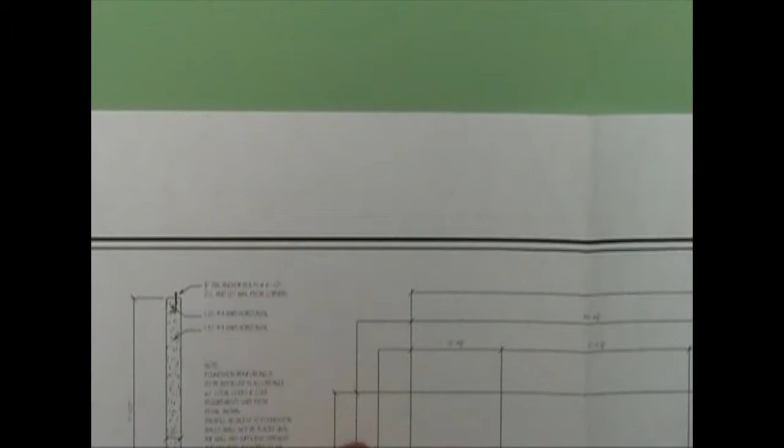Okay, let's look at concrete walls. All right, now for our main, excuse me, the video there. Okay, for the main walls that go around the house, according to this detail, we've got 7 foot 10 inch of wall height. Okay, and that's for the main house, the main wall around the house. So the wall height here, 7 foot 10 inch, and it is an 8 inch thick wall.

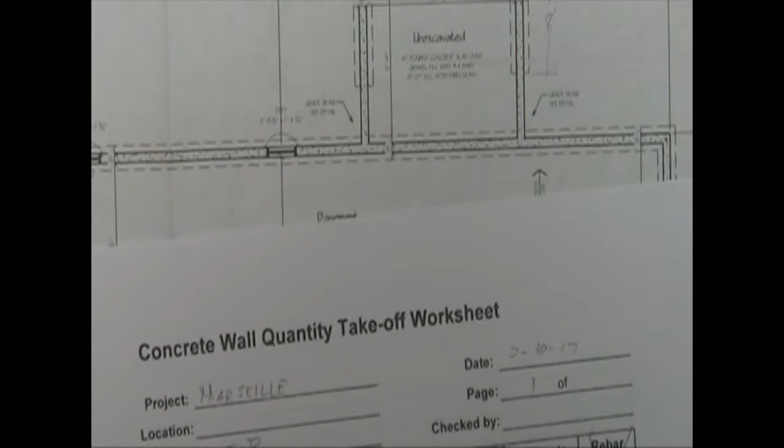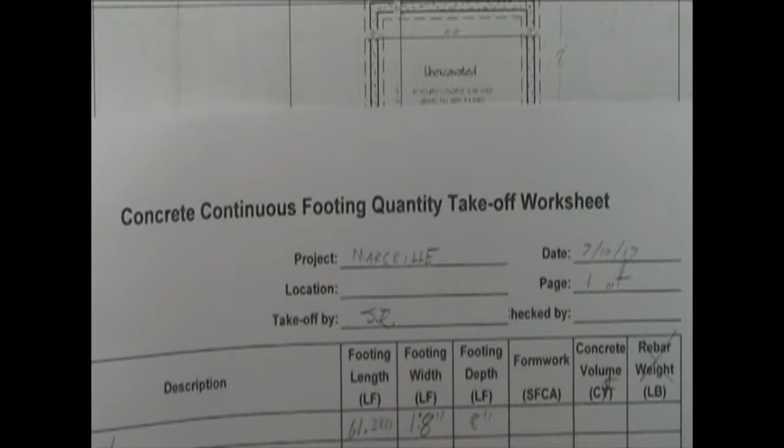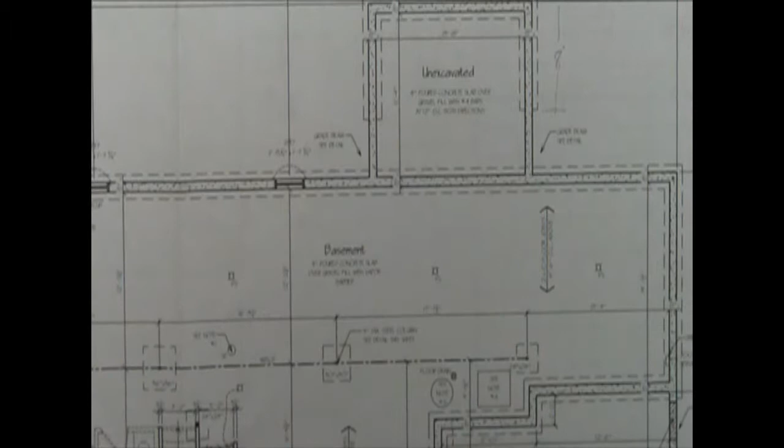Now, for length, you can do the takeoff all over again, going center of wall to center of intersection. However, back when you did your footing, if you did all of these takeoffs the same way for your length, center of intersection to center of intersection, and you kept the main house separate from these out here, which you would have to because these are a different height. The walls are a different height on these out here over the unexcavated area. So that's why I did all of the footing for the main house first and got a total for it.

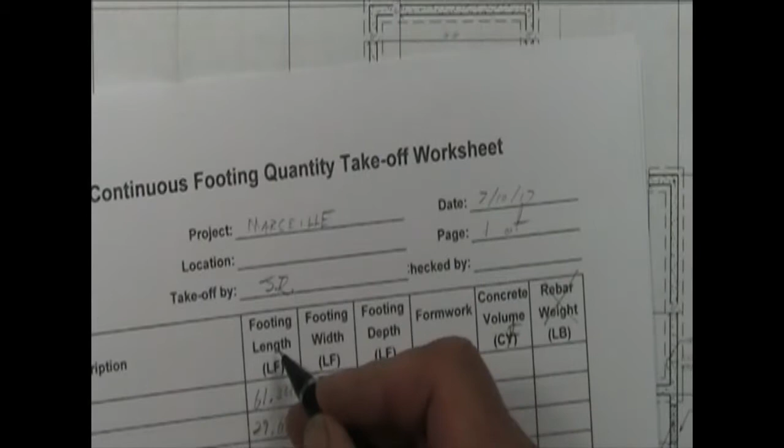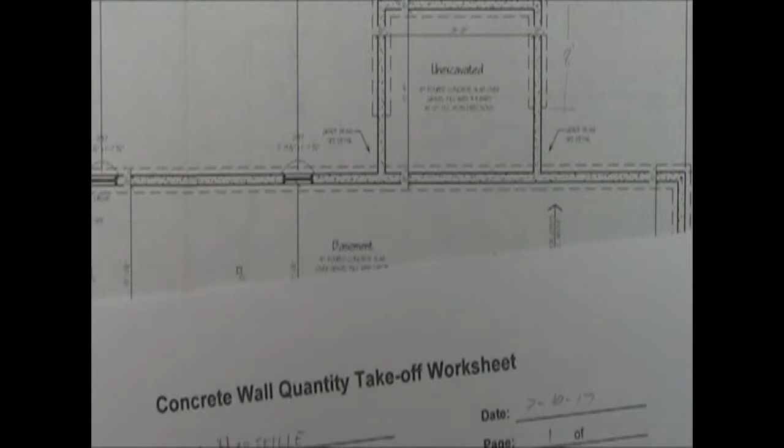Because when we bring the concrete trucks out there to pour the concrete, they're going to pour all of them first. And then they'll do the walls for the main house first. These other footings and short walls and grade beams will come later because they have to backfill some dirt and put some gravel and drain tiles and things like that in. So you can take the footing length that we did on our main house footing, and we can bring that in right here. And we can say main house footing length. I haven't measured it yet, but I'm just going to say 120 feet. That's just my guess right now.

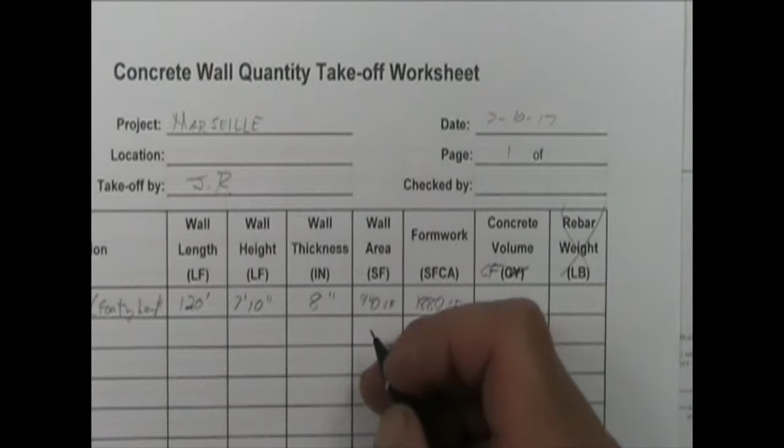Okay, 120 feet. All right, so for the wall area, I want one side of the wall. So that's going to be 120 feet times 7 foot 10 inches, which gives me 940 square feet. That's one side of the wall. Formwork is going to be 2 sides, so I have to multiply that times 2. Gives me 1880 square feet. Now my reason for having these separate is that you may have a situation where you have additional formwork for something. Or you may be pouring a wall that only has formwork on one side. It's unusual, but it's not unheard of.

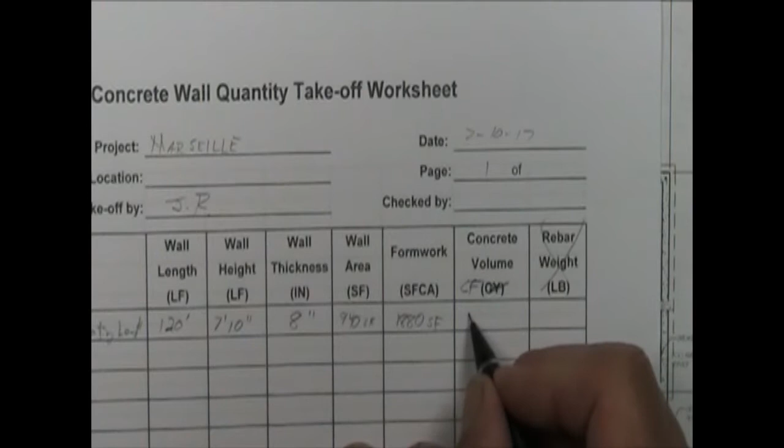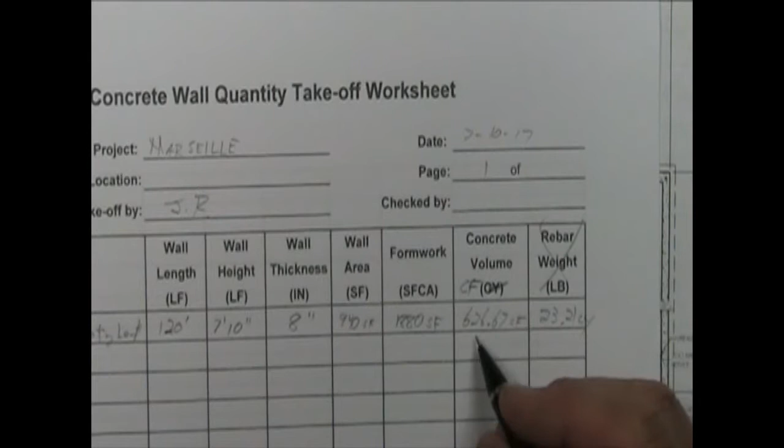Okay, now then for our concrete volume, once again, it's going to be the length of the wall, 120 feet, times the height, times the thickness, which gives me 626.67 cubic feet. Would be 23.21 cubic yards, right? Let me double check that. It did square yards. .21. Okay, so that's the amount for the walls on the main house.

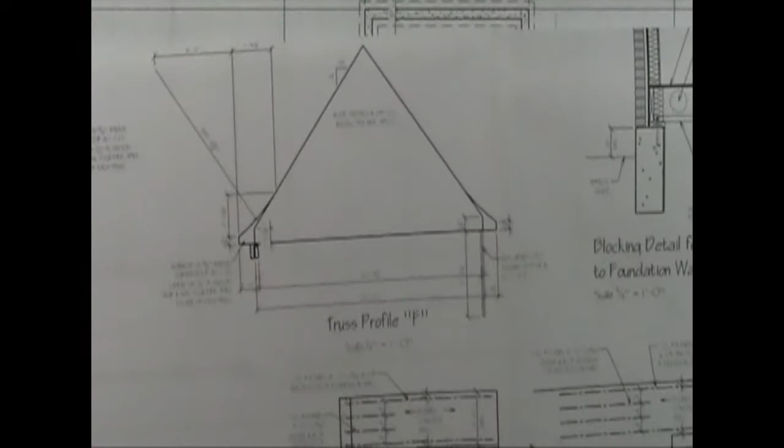Out here on the unexcavated ones, I think it was 2'6" minimum. We're going to assume 2'6". But you got to remember that 2'6" height is from the top of the footing. The grade beam is what goes on out the rest of the way, and it has another 8 inches. Okay. I'm looking at my notes here to make sure there's anything else.

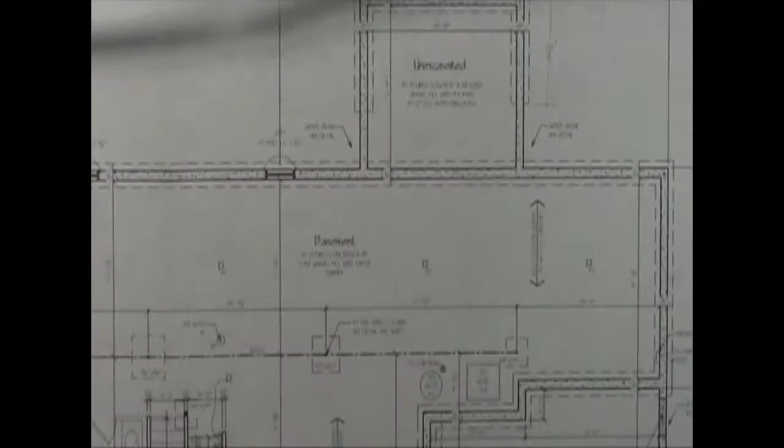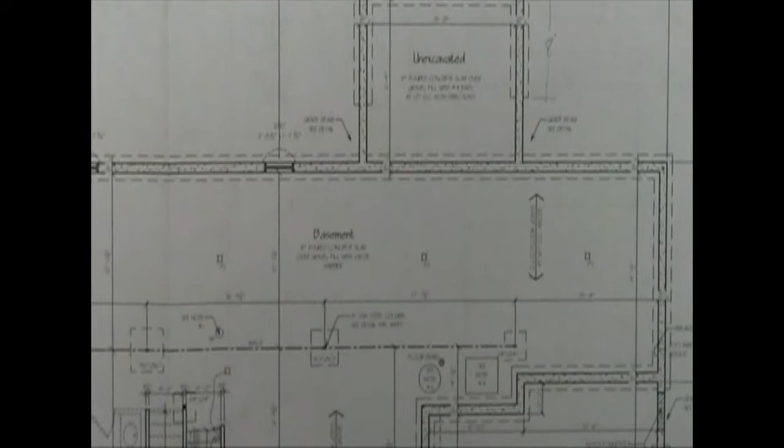Okay, so by the same token, when I did my footing takeoff, I can use that same length of footing for that terrace, for this terrace, and for the garage, with the exception of this little deal out here. That kind of gets a little weird. Oh, you can't see it. Sorry, let me zoom the video out. I keep forgetting.

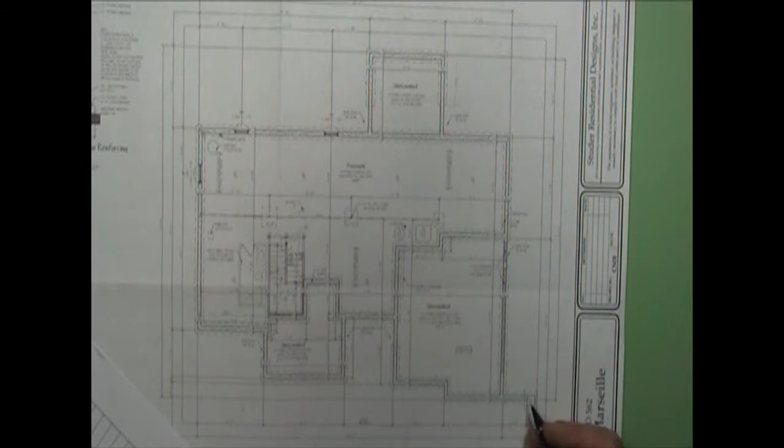Okay, so like I was saying, the length for the footings out here on both terraces and the garage, with the exception of the little pedestal column thing out here, you can take that length of footing and bring it over to your wall worksheet and do it at 2 foot 6 inches tall. Then you have your grade beams, which would be formed and poured at the same time that they're doing the walls. We're calling it a grade beam because it's not sitting on top of a footing right here. So we know they're 4 foot long, each of them.

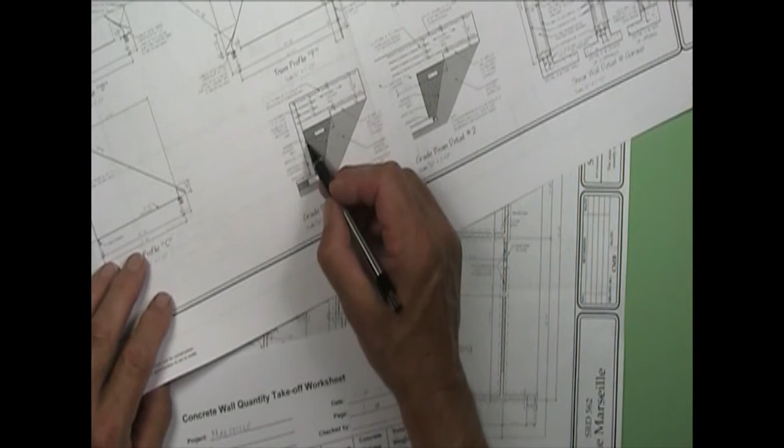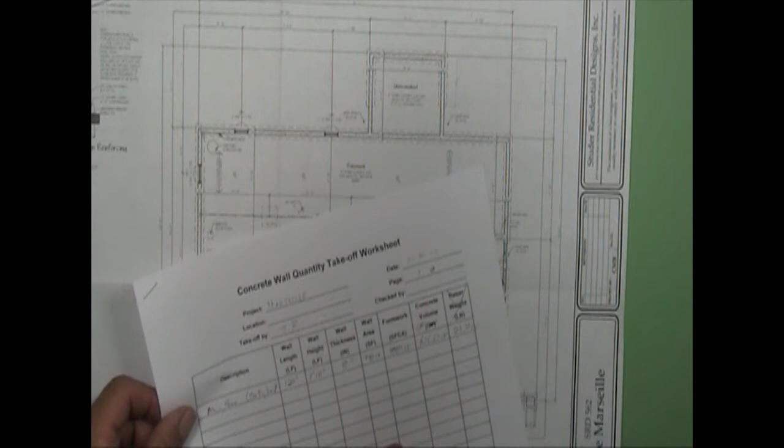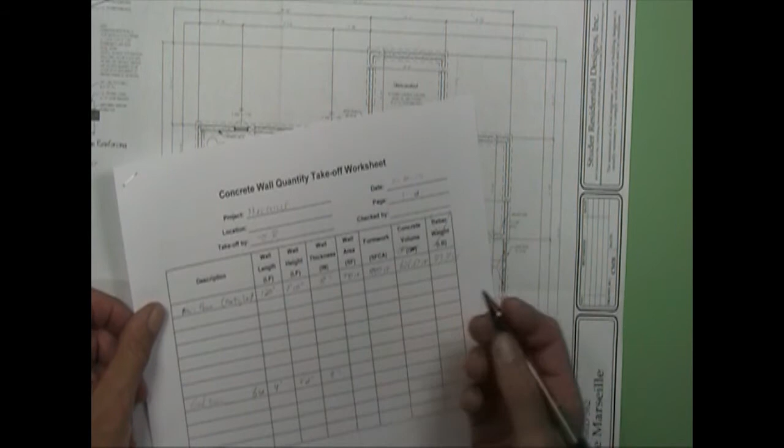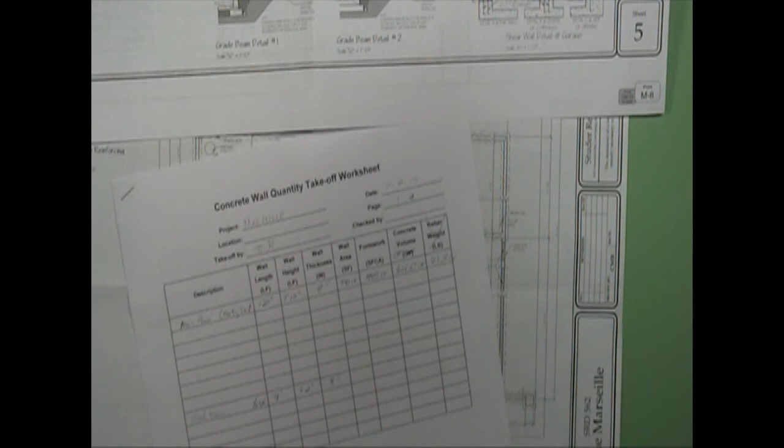So I'll make me another row right here, grade beams, and we know they're 4 feet long. We've got 1, 2, 3, 4, 5, 6 of them. 6 each. And they were 3 foot 2 inches and still 8 inches thick. So they're a little bit taller than the ones before. And so now you would do your calculations just like before to get your wall area, one side, formwork, which is both sides, and a concrete volume. Okay, and since we want them as a separate line in our estimate, but in actuality, they're going to be poured at the same time that the regular foundation wall is poured. Okay, so that's how we would deal with the grade beams.